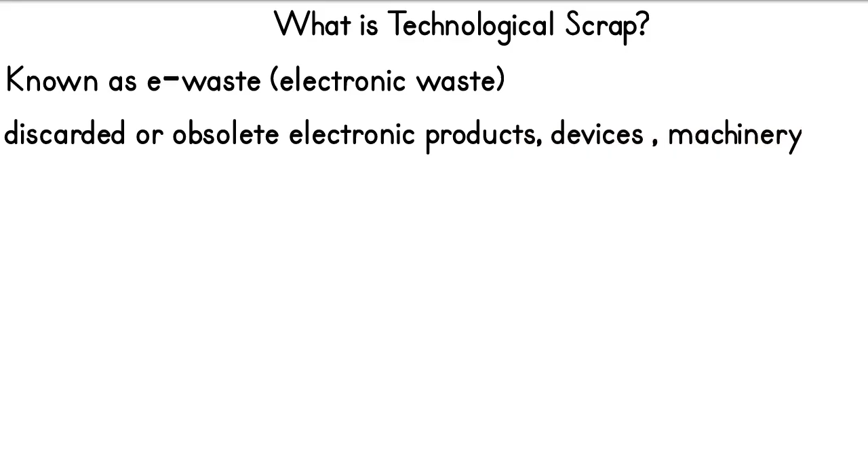What is technological scrap? It is often known as e-waste, electronic waste, and it is the term used to describe discarded or obsolete electronic products, devices, and machinery that can no longer be used or are no longer in demand. It includes products such as smartphones, computers, televisions, circuit boards, batteries, and other electrical components that have either reached the end of their useful life or have been replaced by newer, more advanced technologies.

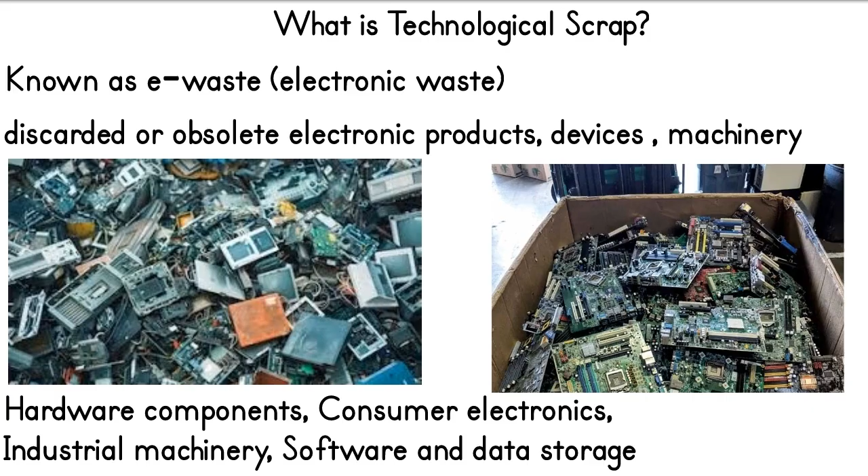Technological scrap can include hardware components, motherboards, chips, wires, and connectors. Consumer electronics, old phones, laptops, and televisions. Industrial machinery, equipment that has become outdated or broken. Software and data storage, outdated storage devices such as floppy disks or old hard drives.

Why is technological scrap important? It holds both environmental and economic significance.

Environmental impact. E-waste contains hazardous materials like lead, mercury, and cadmium, which can harm the environment if not properly disposed of or recycled.

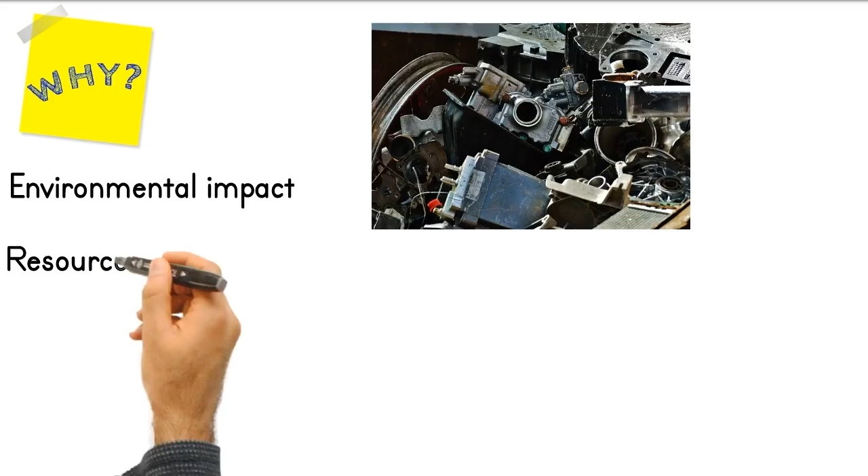Resource recovery. Many electronic devices contain precious metals like gold, silver, and copper that can be extracted and reused, reducing the need for mining new materials.

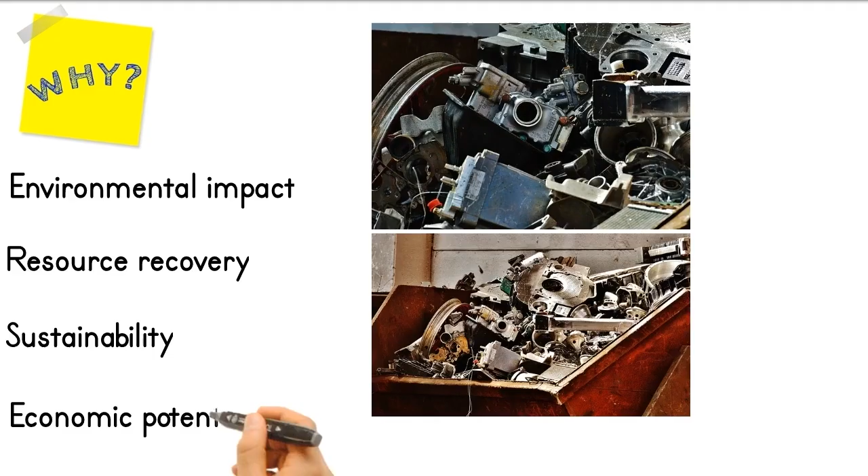Sustainability. Proper recycling and disposal of technological scrap helps promote sustainability and reduces the growing environmental burden of unused devices.

Economic potential. Technological scrap can be repurposed or recycled to create new products, which can generate revenue for businesses specializing in e-waste management. How is technological scrap managed and recycled?

Managing and recycling technological scrap involves a series of steps designed to recover valuable materials and mitigate environmental harm. Technological scrap is collected through e-waste collection programs, drop-off points, or pick-up services. The scrap is sorted into different categories based on the type of device or material.

Devices are disassembled to separate recyclable parts, such as circuit boards, batteries, and screens. Precious metals like gold, silver, and copper are extracted, and plastics or glass are recycled for reuse in manufacturing.

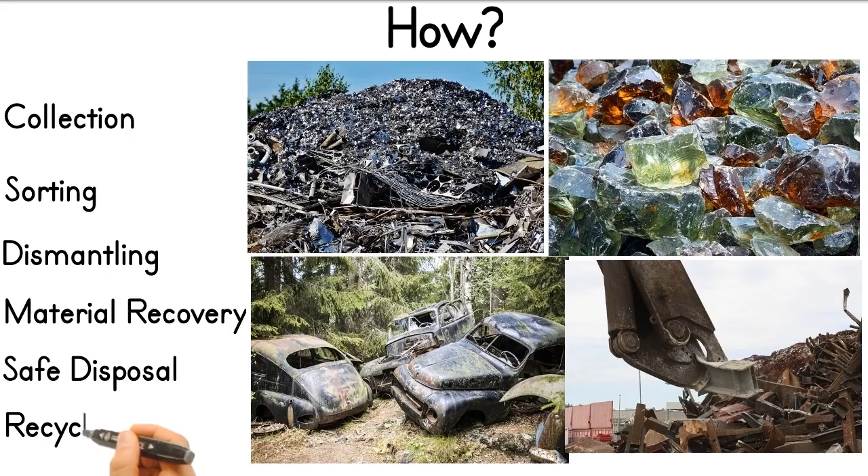Safe disposal. Hazardous components, such as mercury or lead, are safely disposed of to prevent environmental contamination. Recovered materials are sent to recycling plants to be used in the production of new devices or products, reducing the need for raw materials.

Who is involved with technological scrap? Several stakeholders are involved in the generation, handling, and recycling of technological scrap. Consumers, people who replace outdated or broken devices, contribute to e-waste generation.

Companies upgrading their technology or discarding obsolete machinery produce technological scrap. Recycling companies handle the processing, dismantling, and recycling of e-waste, extracting valuable materials while minimizing environmental harm.

Governments and regulators are involved in setting regulations for the safe disposal and recycling of e-waste, including standards for handling hazardous materials. Environmental groups work to raise awareness about the dangers of improper e-waste disposal and promote responsible recycling practices.

Companies that produce electronic devices are also part of the life cycle, including offering take-back programs or producing more recyclable products. When is technological scrap generated?

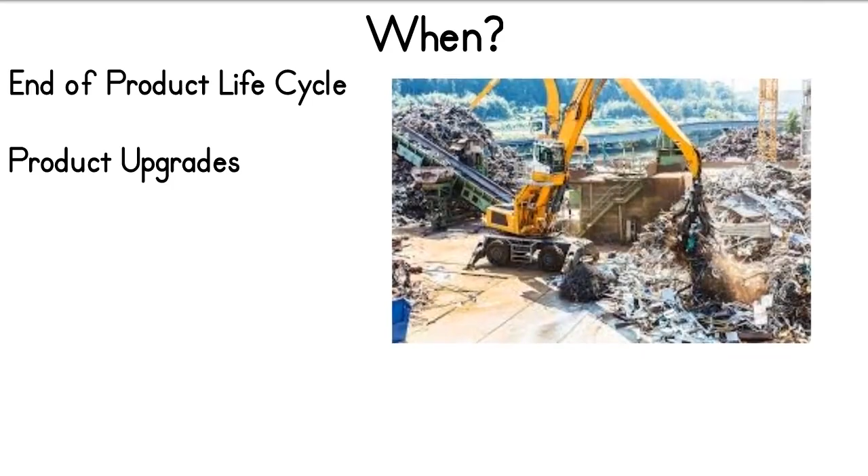Scrap is produced continuously as new products are introduced to the market, and older models or devices become obsolete. Common instances when technological scrap is generated include end of product life cycle, when products are no longer functional or supported by manufacturers. Product upgrades, when consumers or businesses replace old technologies with new models or versions.

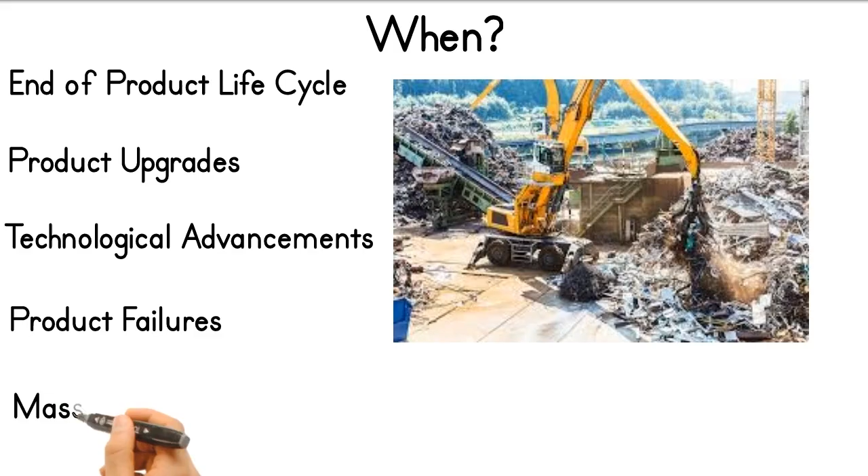Technological advancements, as new innovations make previous devices or machinery outdated. Product failures, when devices malfunction or break down and cannot be repaired cost-effectively. Mass disposal, in industries or businesses that upgrade equipment in bulk, generating large quantities of scrap.

Where is technological scrap produced and processed? Homes and businesses, as consumers replace their electronic devices or businesses upgrade office equipment, e-waste accumulates. Factories and industries, outdated or malfunctioning industrial machinery becomes technological scrap.

Recycling facilities, e-waste is collected and processed at specialized recycling centers where valuable materials are extracted and hazardous components are safely disposed of. Landfills, in some cases, improperly disposed of e-waste ends up in landfills, contributing to environmental pollution.

E-waste collection centers. These centers gather scrap from various sources, including households, businesses, and institutions.

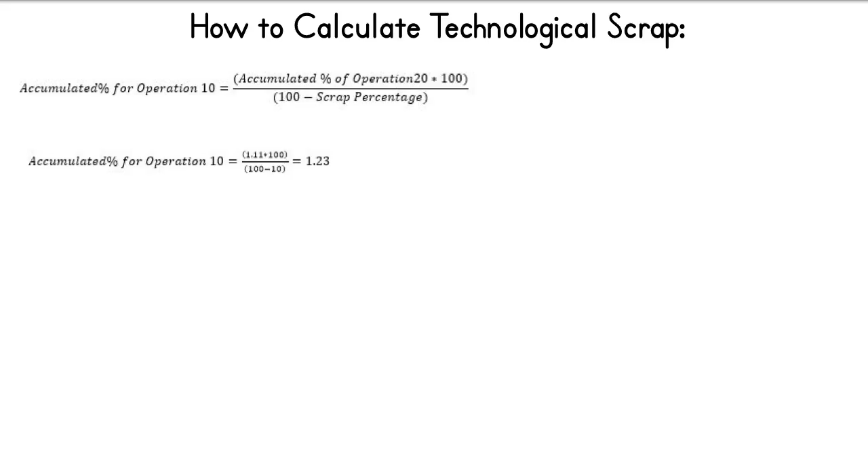The process of calculating technological scrap refers to determining the quantity and value of discarded or obsolete electronic components, devices, or materials that can no longer be used or have been replaced by newer technology. Properly calculating technological scrap is essential for businesses to manage waste, recover valuable resources, and minimize environmental impact.

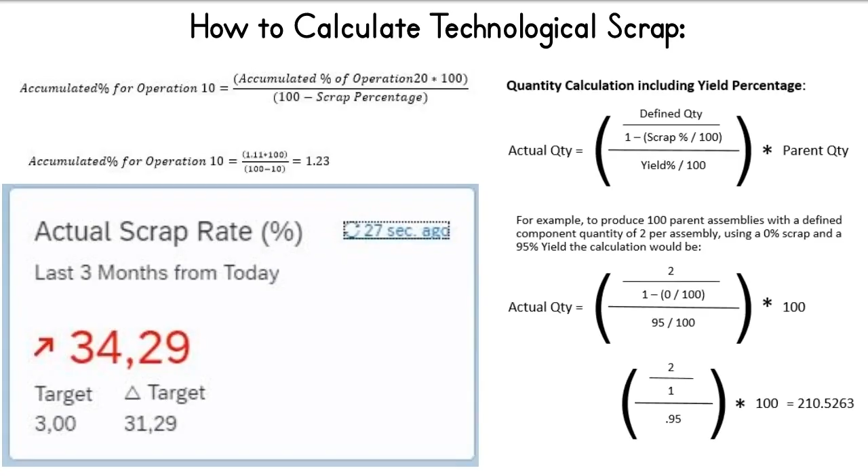This calculation involves assessing the amount of electronic waste produced by a company, industry, or individual over a given period. It includes determining both the physical volume, weight or number of items, and the potential value, in terms of recyclable materials, such as precious metals and plastics, of the scrap.

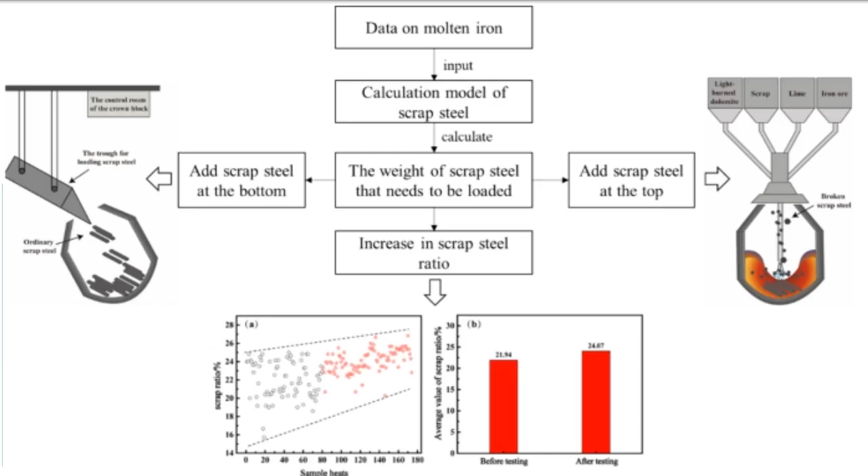This process is essential for managing disposal costs, identifying resource recovery opportunities, and ensuring compliance with environmental regulations. Why is technological scrap calculation important? Calculating technological scrap provides significant benefits to both businesses and the environment.

Resource recovery, identifying valuable materials such as gold, silver, copper, and plastics that can be extracted and reused. Cost efficiency, understanding the amount of scrap helps optimize recycling costs and manage disposal expenses. Sustainability, proper calculation ensures that businesses can recycle or dispose of materials in an environmentally friendly manner.

Regulatory compliance, many countries and regions have regulations on how to manage e-waste. Accurate calculations help organizations comply with these rules. Strategic planning, knowing the volume of technological scrap generated can assist companies in planning for future upgrades or replacements of equipment.

In conclusion, technological scrap, or e-waste, is a growing concern in today's fast-paced tech world. As more devices become obsolete and new technologies emerge, the accumulation of outdated equipment presents both an environmental challenge and an economic opportunity. Proper management, recycling, and disposal of technological scrap can help reduce harmful effects on the environment, recover valuable materials, and promote a more sustainable future.

Through responsible handling and innovative recycling methods, technological scrap can be transformed into valuable resources, benefiting both society and our Earth.